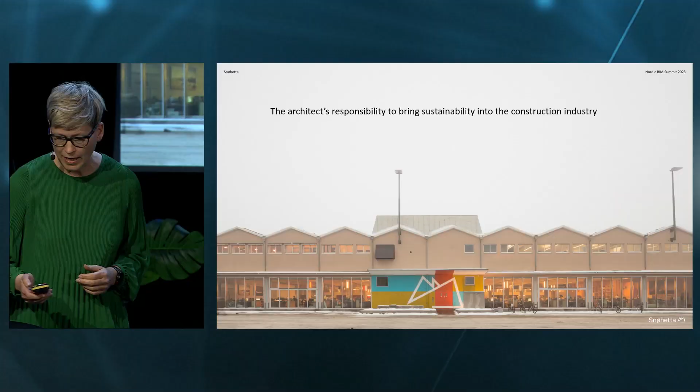Thank you. My topic is to tell you a little bit more about how architects can be responsible for bringing sustainability to the construction industry and really spearheading the development within sustainable building. First, a little bit about Snøhetta, where I come from.

We're an international business. We have studios all over the world, from the US, Europe, over to Asia and Pacific with Australia. The reason for being globally present is that we've been working with projects internationally from day one. Our first project was the library in Alexandria in Egypt, which was an open competition. Having that as a kickoff for an architectural office, we thought we could do projects all over the world.

We're a transdisciplinary design company. We have all the architectural disciplines. I'm a landscape architect myself, and we also have designers with product design, digital design, and graphic design as an integral part of our studio. We work team-based, collaboratively with that transdisciplinary approach, and this is also something we like to do with our external collaborators and clients. We need to understand everybody's perspective to find the solutions in between our different disciplines.

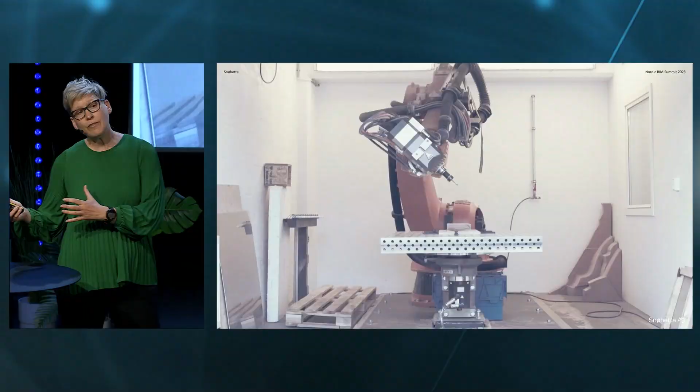We don't only work with drawing, architecture, or work digitally, we also work physically. We have a workshop in our studio space over at Vippetangen here in Oslo, where we can actually also test out, pilot, and experiment with our designs to try and understand the technical parts of every project as well. And even in a workshop, we have digital tools. So we 3D print, we can laser cut, and we can also operate a 3D robot to try and test our designs and our 3D models.

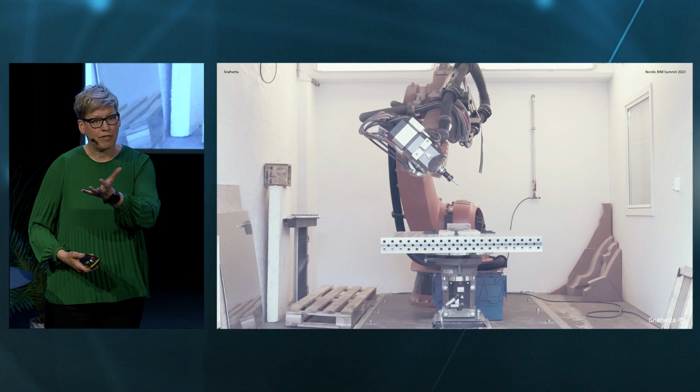Going back in between digital and analog studies changes our mindset and thinking about possible designs, and it also teaches about the physical appearance of a project. So it's testing, piloting, being curious, and through that having the mindset of continuous state of reinvention. Not just innovate, try to find new solutions, but try to base it on what you already know and see if you can tweak it a bit. Ask the questions, be curious, find a way of driving your own field.

And when we talk about sustainability, that mindset is key also in how we think about what our possibilities to make a change is. This is a small sculpture which is in Berlin, and for me it's been really inspirational on how we should think about our role in driving the changes within sustainability. It's Isaac Cordal, who's the artist behind this small sculpture, and it's called Politicians Discussing Global Warming.

And to me, it tells me: don't wait. Do what you know today and try to make a change. See for every possibility of driving a sustainable change in your project.

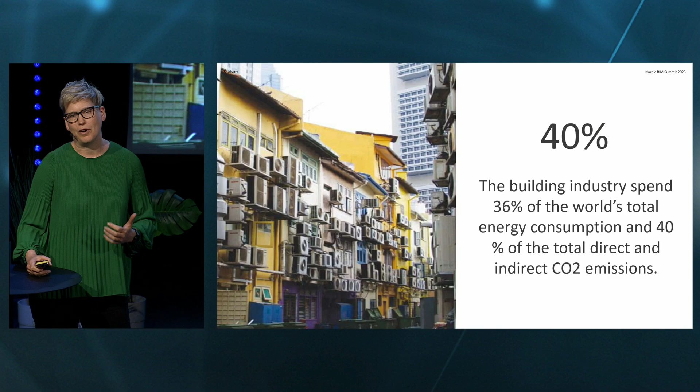And for the industry, we have some figures that we really have to work on. We are responsible for 36% of the world's energy consumption and also 40% of the total direct and indirect carbon emissions. And we can't just count the direct consequences, it's also the indirect emissions.

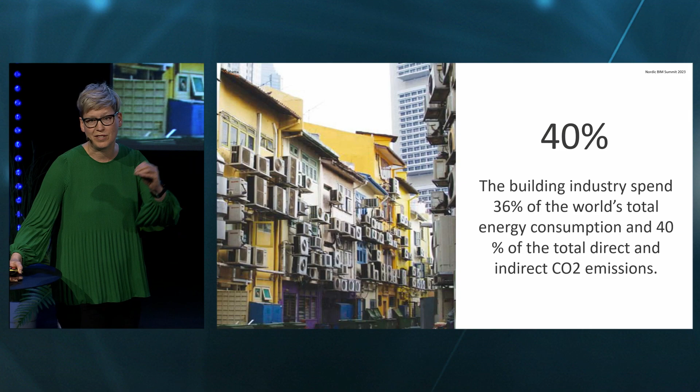11 years ago, we entered into a collaboration called Powerhouse. And I'm going to show you a project example of that first, as a practical example on how architects can contribute and also change the mindset in the building industry.

This was in 2011 when the passive house standard had just appeared in Norway, and we said, well, okay, passive house, that's challenging, but what about doing plus energy houses? Why be content just with passive house? We should actually make renewable energy producing buildings of itself.

And we, of course, understood pretty quickly, even from being architects, that we couldn't do this alone. We had to collaborate. A partnership was established with all of the different parts of the value chain within the industry. And that was important. We had to work throughout the whole industry chain to actually set such high, ambitious sustainability targets, because the entrepreneur, the building owner, the actual tenant of the building or the user of the building, the engineering competence and the architect had to do this together.

We didn't know how we were going to perform and do a plus energy building at that time, but we just agreed that was our target. In order to do so, we had to find new ways of working together and to collaborate. We had to understand we needed to bring everybody around the table from day one. So we needed to front load a lot of the expertise and a lot of the working together from what was traditional at that time. We needed to bring everybody around the table, even the operator and the entrepreneur, before the architect had made any sketch on the table.

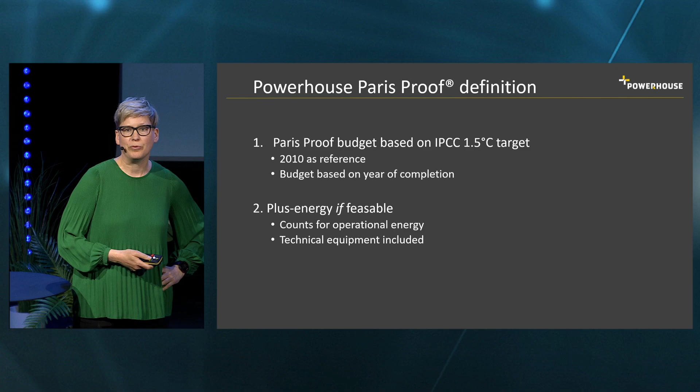And we need then to also bring in all the calculations, the full life cycle, the cradle-to-cradle perspective of every building. So all the materials, all the transport of the materials, the construction, the operations, and fundamentally also the afterlife of the building. And that's where, for instance, design for disassembly comes in.

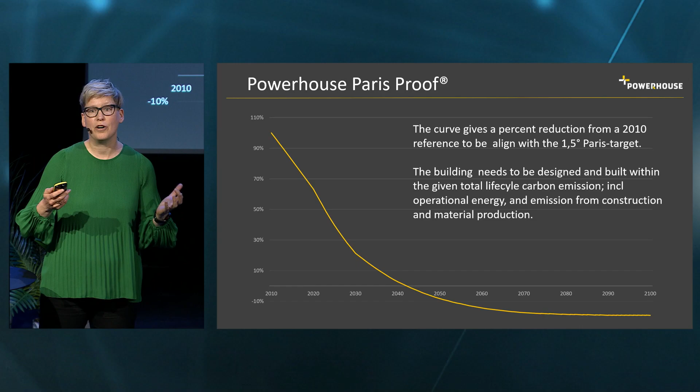We need to make sure that everything that we use in that building and the construction site can be reusable afterwards as well. And we looked into different ways of doing that, but it needs to be reinvented for every new project. We need to bring in the expertise that we already have, and we need to find the new measures on how we can lower the carbon emissions.

And reuse and rehabilitation of existing buildings still have the best carbon emission budgets. So in our processes, we make sure then that it's not just about cost, time, and quality that we look into and agree upon, but it's also on every part of the discussion, the carbon calculations. So we need to bring that into the discussion as well, and we need to have the full overview and full measurements of the consequences of all of our projects.

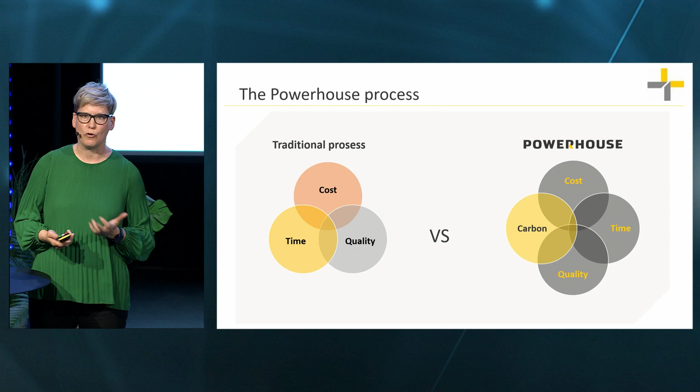We've finalized already 4 built projects, and they are a little bit different in scale. Some of them are new built office buildings, there's a school, and it's a refurbishment of an existing building, which is the first powerhouse project that we did. It was opened now close to 10 years ago in 2014, and it was a full renovation of 5 cubes.

Small black cubes, we would say, from an architectural perspective, outside of Sandvika. And we couldn't change the appearance of these buildings. We had to work with what was there already, but still, it's a full refurbishment of the building.

And we were successful in reducing the energy need of the building itself, and we reduced it by 90%. And it's a little bit sad that buildings from the 80s needed to be fully renovated, and you could actually lower the energy consumption of the building by 90% in the 20s. So it's a full rehabilitation.

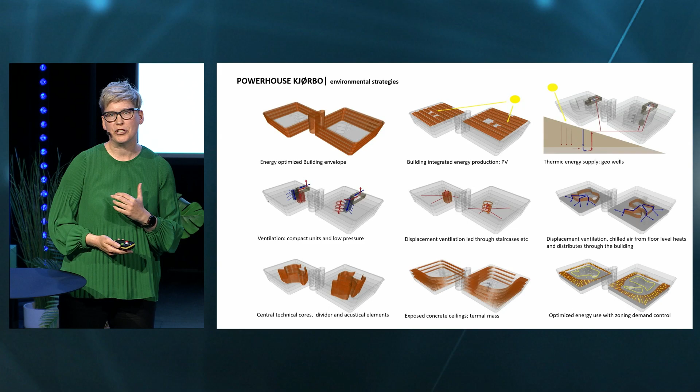And we used existing openings in the building, like the internal stair, as a ventilation shaft, because the air comes out on a very low speed, and it just warms up with the heated air inside of the building and lifts throughout the building, a typical physical way of how heated air moves. So trying to use the active and the passive understanding on solutions have been critical, and the collaboration in between the different disciplines has been critical in integration of solutions in the design of this building.

The learnings from the Kjørbo project we brought into the new project as well, making sure you can minimize the energy demand of every building, produce renewable energy on site through solar panels, and get thermal energy through geothermal wells or heat pumps from the fjord. But we also have to find new ways of lowering carbon emissions, through design for disassembly, flexible use of space, and building fewer square meters than what we need.

In that hunt for carbon reduction, we've worked with different distributors and producers of materials, asking them what are the carbon figures in your material and your product. Through that questioning and investigation with producers, we've seen that as architects we can engage in finding new materials. In recent years we've worked closely with the industry to find low carbon emission materials and innovate within that field.

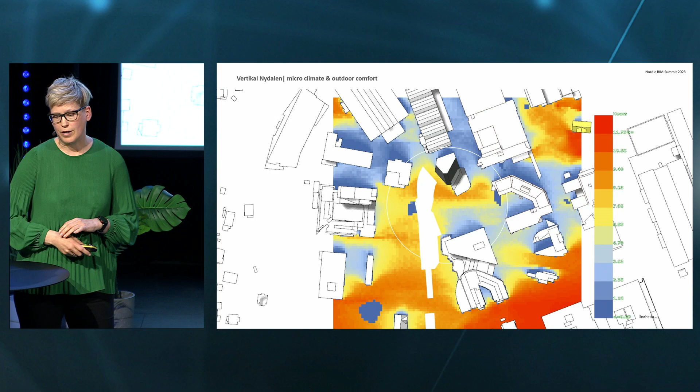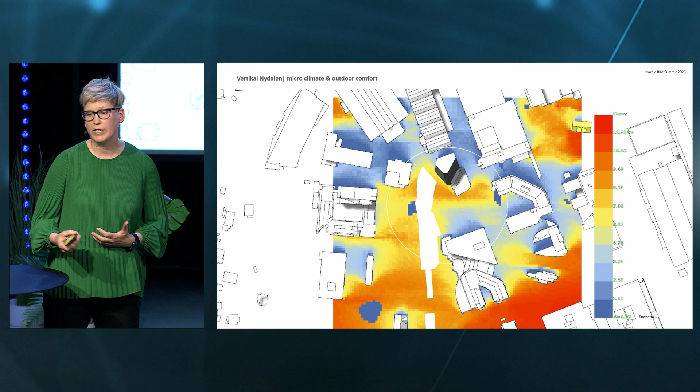Here in Oslo, we currently have a building site close to finalization: the Vertikal Nydalen project, the first of its kind in Norway, with natural climatization. It's a high-rise with a mixed-use program of housing and offices, plus a service program on the lower floors. That's also been part of an innovative approach, working thoroughly with partners to understand how we can shape a building based on the local climate that can be naturally climatized, and through parametric design and transdisciplinary collaboration with partners, really create a new way of thinking.

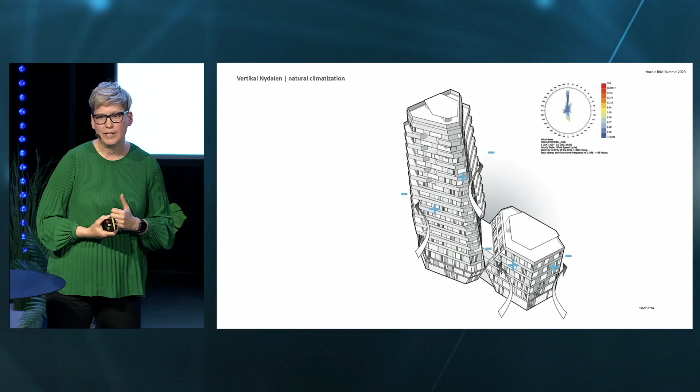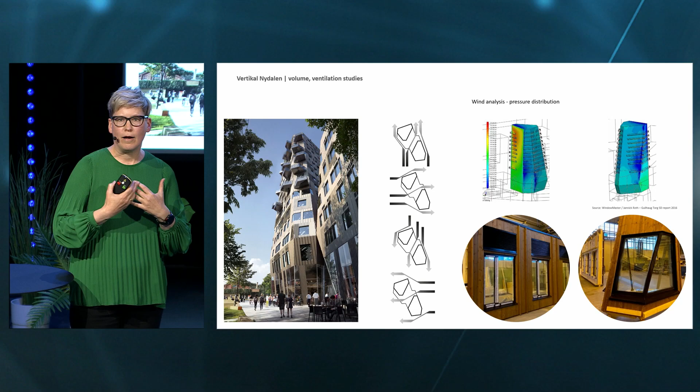Instead of ventilation shafts or active systems, the building only has smart hatches in the facade which open to bring fresh air in. This is done through a parametric design approach, making angles on the building that drive air through it, with all facade elements thoroughly designed to reach that approach. It's a wooden building with a concrete structure inside for thermal mass, providing passive heating and chilling, using the powerhouse expertise I mentioned.

It's finalized in late fall this year, and we're looking forward to seeing the actual measurements of the building. Through this project we've also collaborated closely with other parties in a technology, process, and people-driven mindset. That's been a good learning for us that we'll bring into our next projects, making sure we can actively work together with digital tools, understand everybody's perspective, and make that change towards sustainability. Thank you.

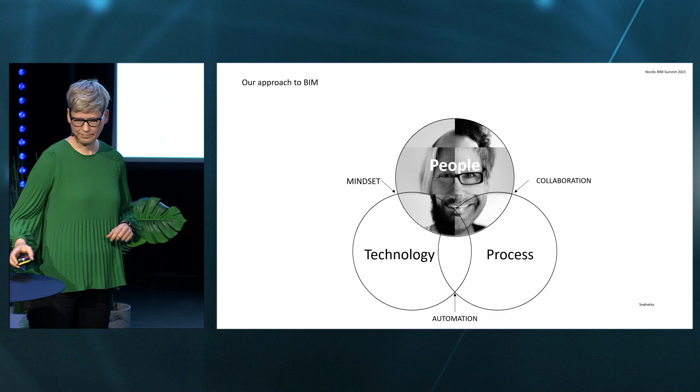Thank you. I get inspired hearing you talk, and you also make me want to move to Oslo, because that house was super cool, right?

In the intro for this speech, you posed the question, can architects step into the breach to create a more sustainable architecture? My question to you is, are they? I would say yes, they are. As architects, we are in a position of bridging the gap between the different parts of the value chain within the construction industry, and I experience architects taking that position and leading the way. So sustainability is at the front of the collaboration and in the BIM use—that's where it comes in super handy. You will also be part of our discussion later on with the other guests.